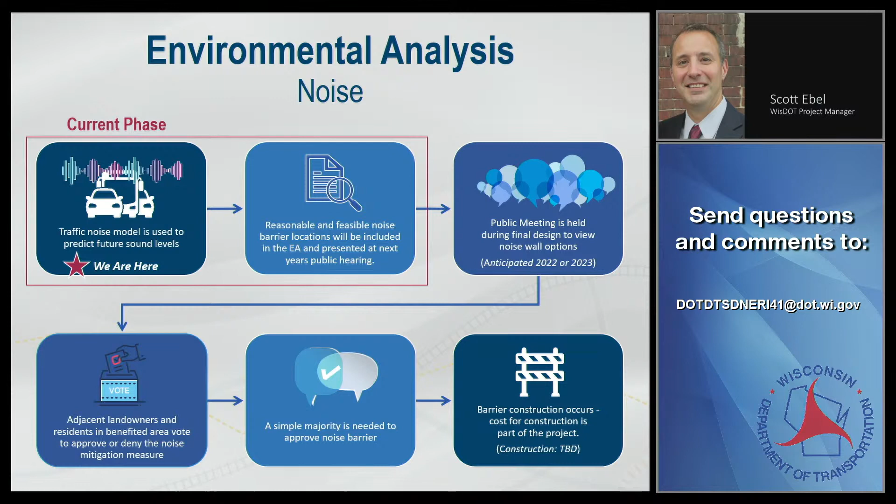We have a number of alternatives that we'll be looking at to treat the area in between closely spaced service interchanges, and between service interchanges and system interchanges. So I want to identify those right now.

One of those alternatives is an auxiliary lane alternative. An example of this would be the condition between Ballard Road and 441 as it is today, where we have an additional lane that parallels the through lanes of mainline traffic to facilitate weaving of vehicles.

There's a second alternative between interchange ramps called a collector distributor roadway, where traffic entering or exiting the ramps is routed onto a parallel roadway to the mainline roadway, so that weaving movements between vehicles destined for different locations occur off the main line of traffic, typically resulting in better operation and safety for the main flow of traffic.

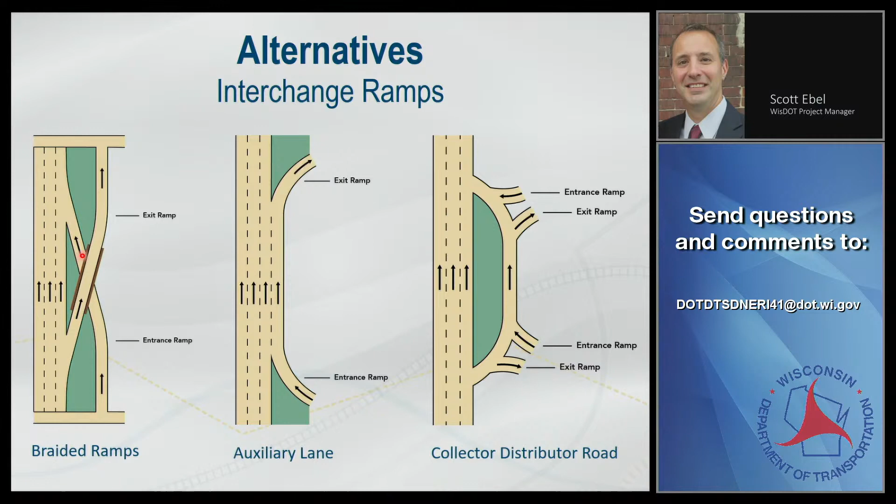There is a third alternative that we're looking at in a couple locations called a braided ramp, where instead of allowing the weaving to occur, we instead use a structure to have one direction of traffic move over the top or underneath the other direction of traffic between the exit and entrance ramps, so that weaving does not occur and we don't have any operational or safety issues related to that weaving.

Alternatives for our main line of the roadway include a 6-lane alternative, with 3 lanes of traffic in each direction and the potential for an additional auxiliary lane between some of the closely spaced interchanges. Along with this, we are also looking at a 4-lane typical section alternative, which would essentially reconstruct the facility similar to what's out there today, again using auxiliary lanes or some other treatment between closely spaced interchanges.

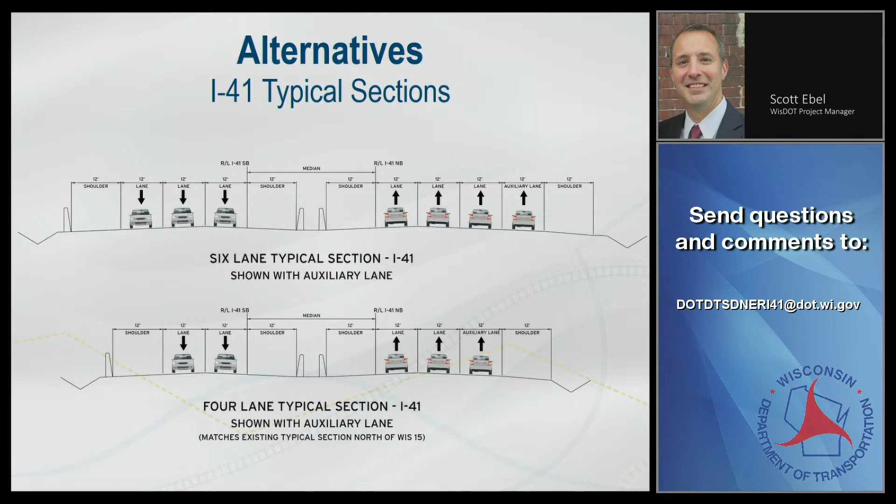We also have typical sections to show other treatments between interchanges. At the top is our 6-lane alternative with a collector distributor road. Here we have our main flow of traffic, and then a parallel roadway to handle ramp exit and entrance traffic off of the main flow. This treatment between interchanges can also be applied on the 4-lane mainline alternative.

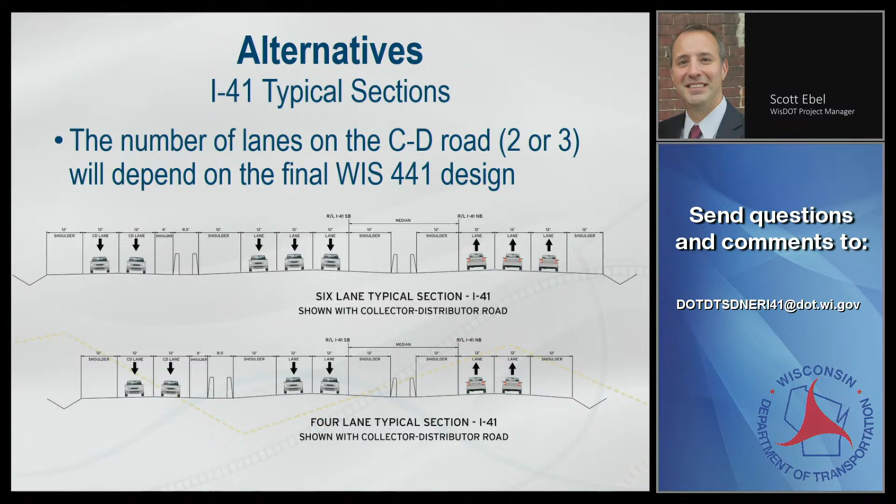At this point, I'm going to start going through specific interchange alternatives, for the most part heading from the south side of the corridor to the north side. We'll start at Highway 15 and County OO interchange with I-41, with 2 different diamond interchange alternatives. One of those would be a traditional signalized interchange, and the other one, instead of being signalized, would include roundabouts for the ramp terminals.

The costs here are very equivalent. The difference in impact is primarily real estate with the roundabout alternative. We also have a diverging diamond interchange alternative for this interchange. Again, costs are very comparable, and there would be some minor real estate impacts in line with the signal alternative, but less than the roundabout alternative.

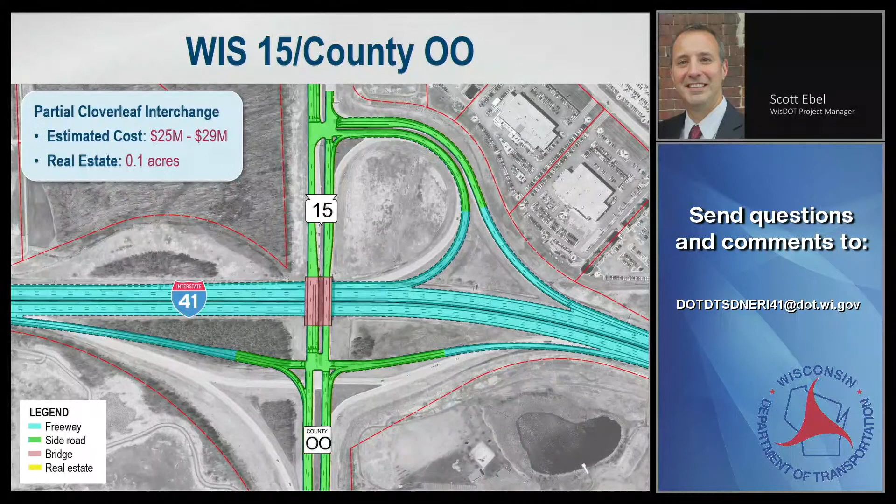We also have a partial cloverleaf interchange alternative for this interchange. This configuration is very similar to what's out there today, involving the loop ramp configuration on the west side of the mainline highway. On the east side of the highway, we would be going to a more traditional intersection format for both movements, essentially replacing the free flow condition that's out there today for traffic headed east, so that we don't have that weaving condition between the interchange and Blue Mountain Drive.

Along with that, in that similar configuration, instead of the partial cloverleaf with signals, we would also have as an alternative using roundabouts for those intersections.

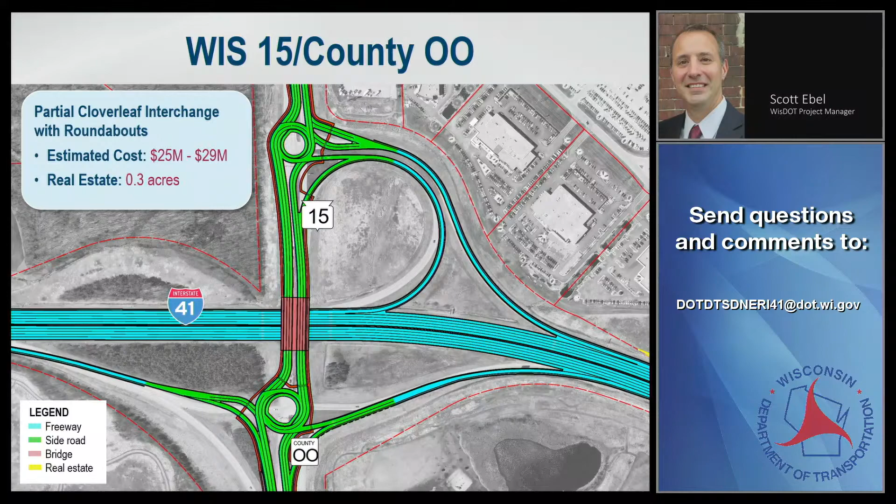I also want to point out that with a number of these alternatives, we are looking at the potential to eliminate access from Association Lane onto Highway 47. It's currently a right-in, right-out access, so we're looking at the potential, if there are safety or operational benefits to doing that.

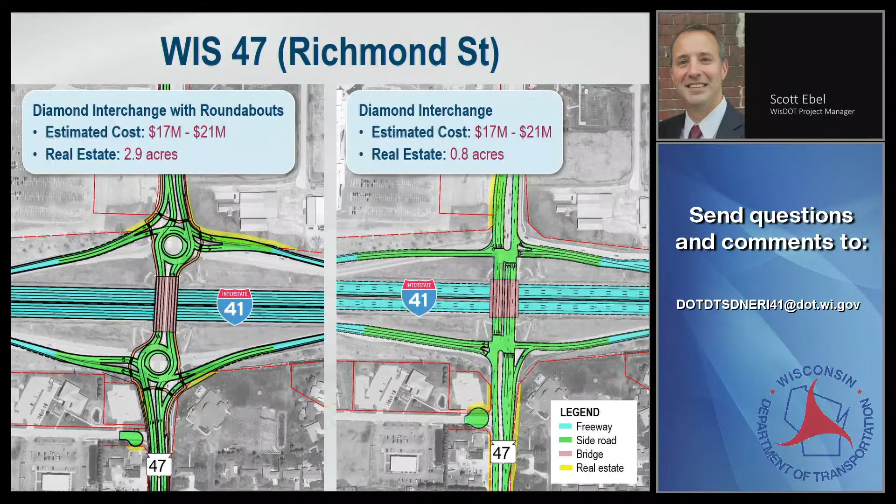We are also looking at the diverging diamond interchange as an alternative at Richmond Street. It has comparable costs to the other interchange alternatives and comparable real estate impacts, kind of between the signalized and the roundabout alternatives.

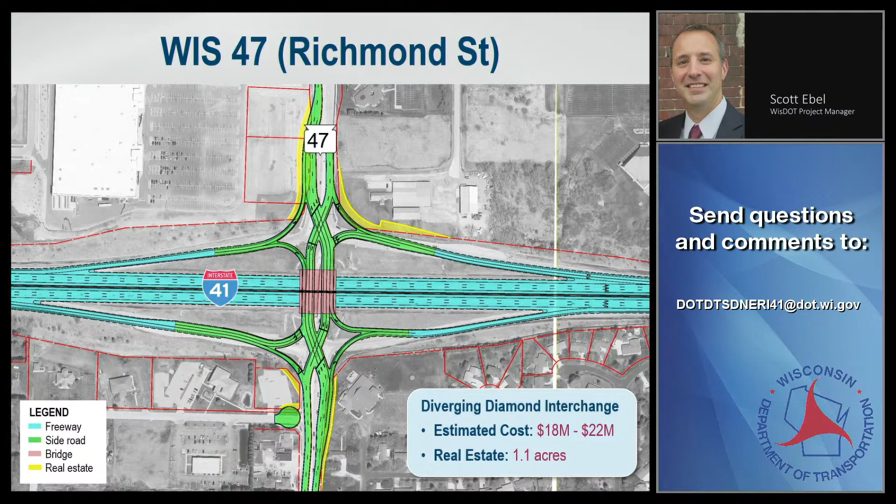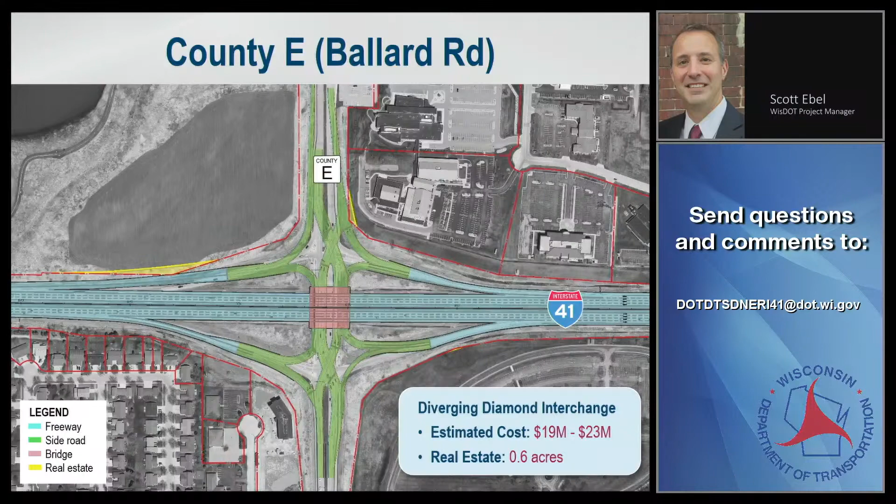Looking at alternatives for how we're treating traffic between the interchanges, I wanted to show a number of alternatives for how we do that. The first of these, and the one with the largest footprint impact, would be to use a braided ramp alternative. To explain a little bit how this works, on the left side of the screen would be the Ballard Road interchange.

On the right side of the screen would be the Highway 441 system interchange. If traffic coming from Ballard Road wants to get onto I-41 heading northbound, they would stay at the left-hand side of the split, then cross over traffic from 41 that's ultimately heading to 441 southbound, instead of having to weave with that traffic, and then would enter the traffic along with other I-41 traffic continuing northbound.

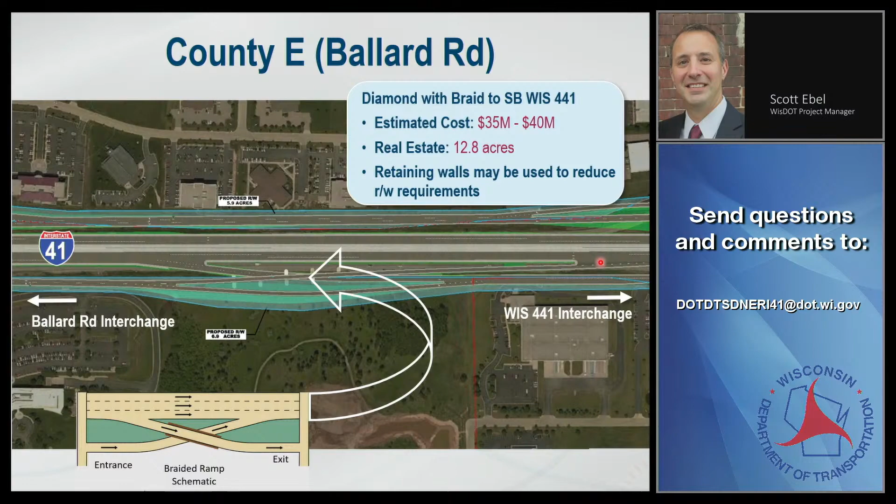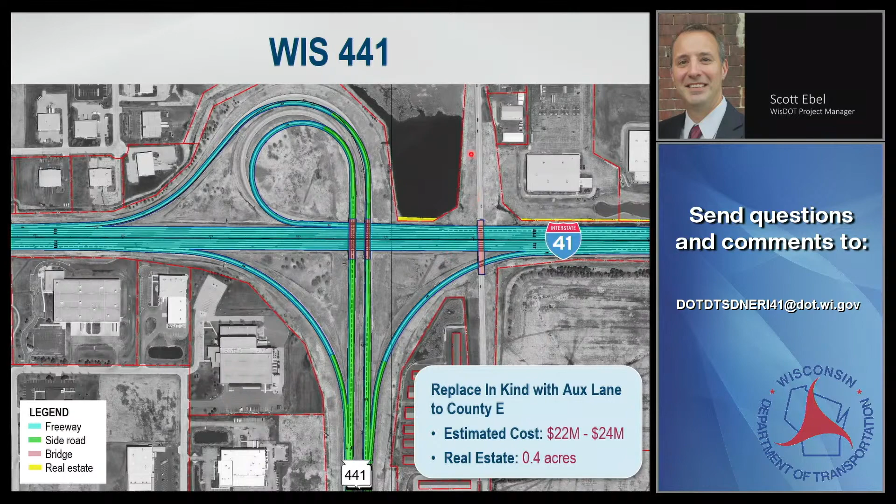We also have an alternative very similar to what is out there today, which would include an auxiliary lane between the Ballard Road interchange and the 441 interchange, with the two ramps in a similar location and configuration. With all of these alternatives for the 441 system interchange, we are proposing to replace the French Road bridge over I-41 and maintain that connection between Evergreen to the north and County Highway OO to the south.

Shown on this display is a 60 mile an hour flyover alternative. The higher speed ramps in this alternative do have some additional real estate impacts. I do want to point out that where we've identified real estate impacts, there could still be opportunities to further refine the design or use mitigation such as retaining walls in order to decrease the amount of real estate required.

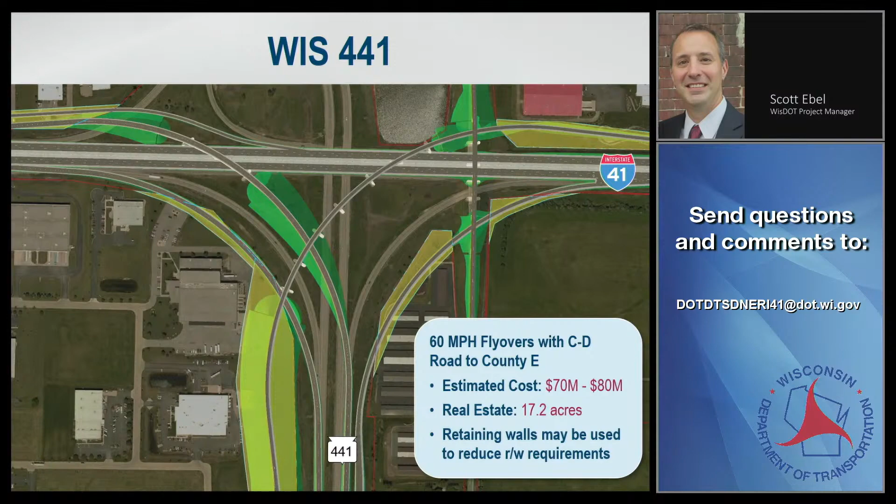Shown here again is that 60 mile an hour flyover alternative from an isometric point of view.

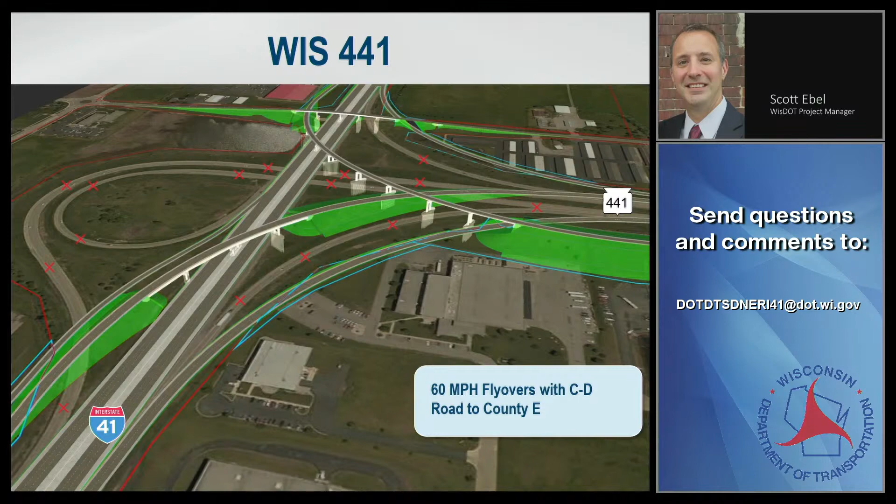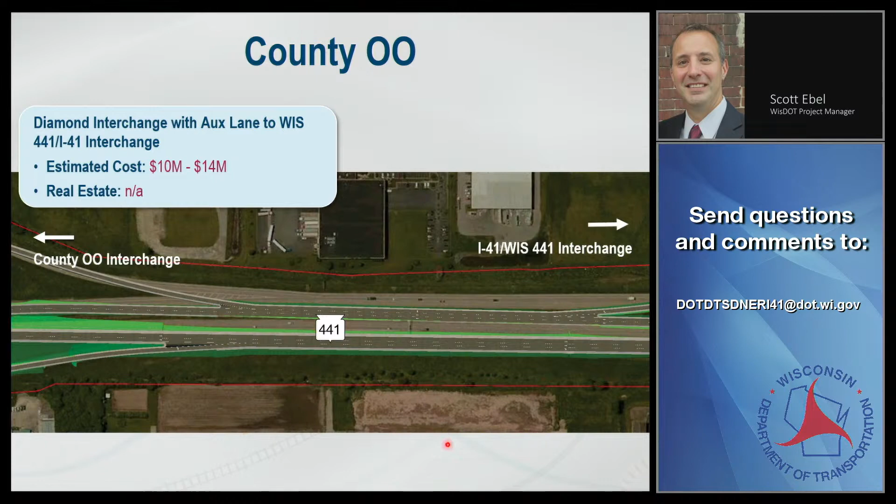One of those alternatives would be a partial cloverleaf, as Par-Clo refers to it on the slide. This would move the exit to Highway OO for 441 southbound south of the interchange instead of being on the north side. By moving it further south and using a loop ramp configuration, we are able to increase the weave distance available for vehicles headed south. This does have some real estate impacts and additional cost.

Under this consideration, we likely would not do anything with the northbound direction, since that reduction in weave distance is not as significant as on the southbound direction with most of the alternatives.

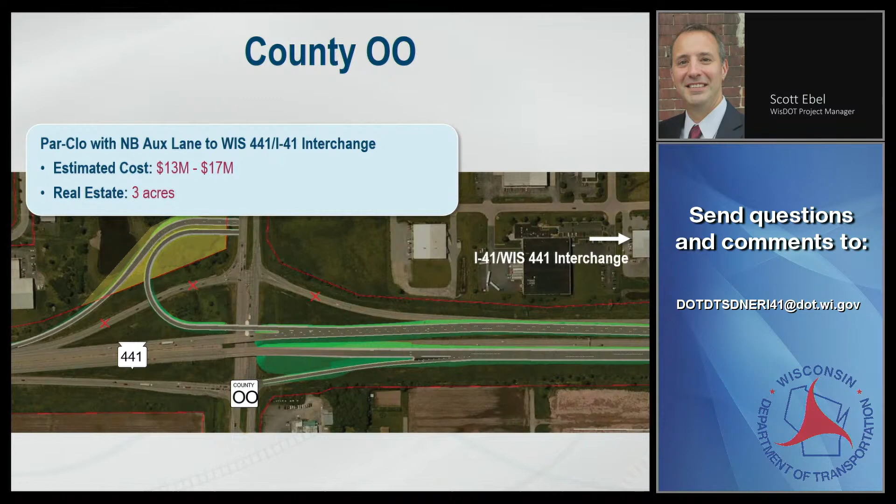This is that partial cloverleaf alternative for OO laid out in an isometric view. This is a third alternative to handle traffic between OO and I-41 along 441. We would also be looking at a braided ramp alternative here.

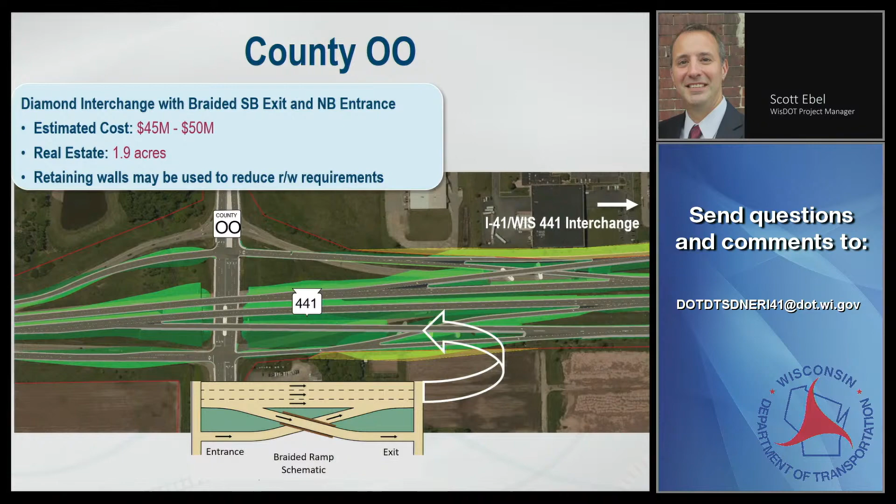This alternative does have a significantly higher footprint, but it does also have significant potential safety and operational benefits. I will switch to an isometric point of view to help describe how this would operate.

As a for instance, if traffic that was at OO and wanted to get onto 441 to ultimately get onto 41 northbound, would take the ramp or get on the ramp, would stay on the right hand side of the road and would continue and merge with 441 traffic that is already only destined for 41 northbound. So they do not have to weave with traffic that is trying to get to I-41 southbound as vehicles do today.

Similarly, traffic on OO that wants to ultimately get to 41 southbound would stay to the left at that first split, would then merge with 441 traffic that itself has already split into and includes only 441 traffic destined for 41 southbound. So that weaving that occurs today does not occur, which improves safety and operations.

I do also want to point out with this alternative that it could be applied not necessarily to both directions of traffic. It could be applied or selected as an alternative for just one direction of traffic. So for instance, if the southbound weave condition is worse operationally or safety-wise than the northbound condition, it could be applied in only the southbound direction and not necessarily be required to also be applied to the northbound direction.

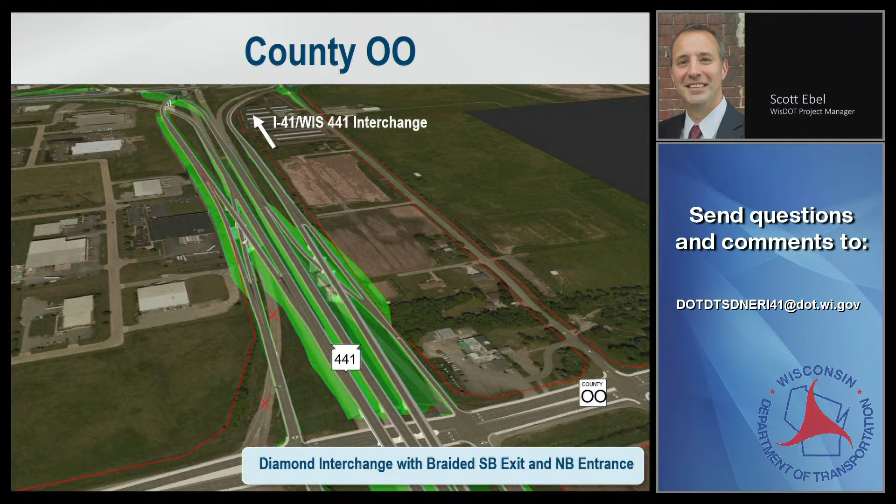Continuing to move north at the County Highway N interchange, at this location, we are primarily looking to keep a configuration similar to what's out there today. We are proposing to maintain signalized intersections at this location. We would be replacing the pavement and the ramps, and we would be replacing portions of County Highway N.

To the north and south of the interchange as would be needed, both to replace any older pavement up to the adjacent intersections, and also would be coordinating with the local community on any additional capacity that would be expected here. For the most part, we're trying to minimize any real estate impacts, especially to the south. This is a very built-up area.

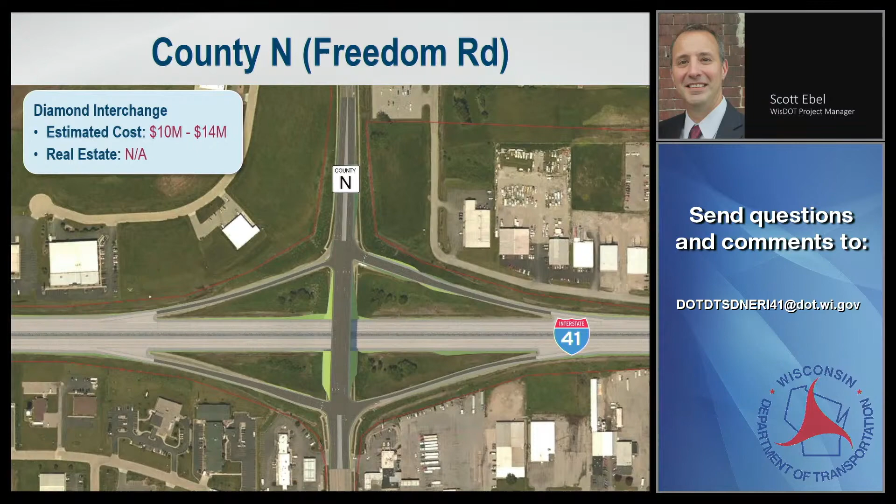At the Wisconsin Highway 55 interchange, again, we would not be looking to make any significant changes at this interchange. This interchange was recently reconstructed to include roundabouts. So we would basically be reconstructing the ramps to the limits of the previous project.

We would also be looking at the potential to increase the number of lanes between the roundabouts underneath the interchange in order to make sure that Highway 55 is handling the traffic it would expect to get. As part of this, also want to point out here that the bridges for I-41 over Highway 55 and also over Maloney Road would also be reconstructed as part of a mainline reconstruction alternative.

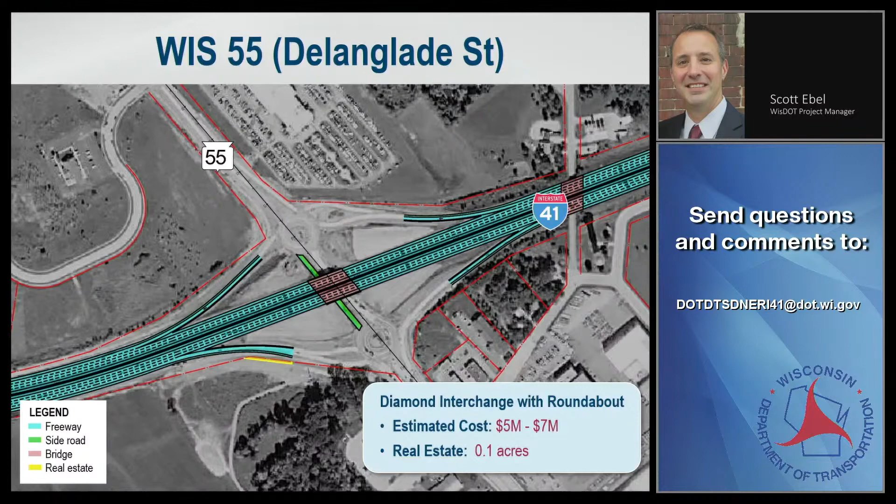At County Highway J, we would again be proposing as an alternative a fairly minimal change from the existing condition. This interchange was reconstructed, I believe, in 2010 with roundabouts. We would again be looking to reconstruct the ramps up to the limits of the previous project so that the ramps would be all new pavement.

We would also be looking to replace the County Highway J structure over I-41 and would be working with the local communities in terms of potential needs there for future bike pedestrian access, that sort of thing.

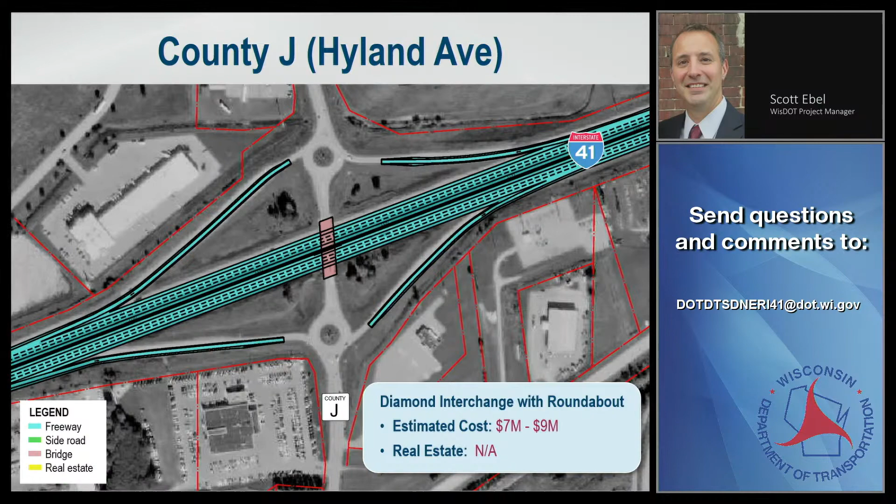At the County Highway U interchange, we have a number of alternatives as well. County Highway U, the first alternative I'm showing here is a diamond interchange alternative. This is very similar to the condition that's out there today. We would just basically be replacing and realigning a segment of County Highway U to make sure that it can handle anticipated traffic growth in the area.

We would be under this not anticipating too much for additional real estate impacts.

We also have another alternative for County Highway U that we're calling a reversed diamond interchange, where we would essentially change which road is the overpass road here. Currently, I-41 goes over County Highway U. Under this alternative, County Highway U would go over I-41.

This has some potential safety and maintenance benefits. It would be potentially easier to keep ice off of I-41 without having that structure go over the top of County Highway U, and it would also improve the geometrics of the southbound entrance ramp from U to I-41, in that you wouldn't be going up as steep of a hill when you're trying to make that merge onto I-41.

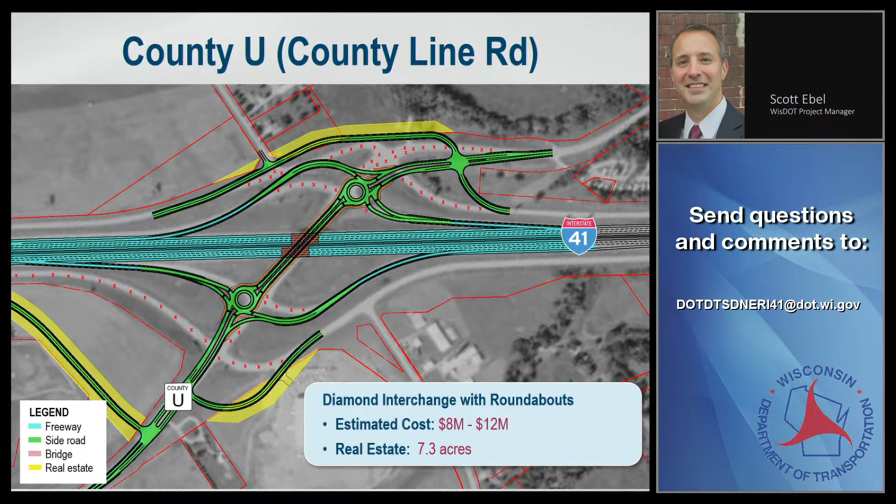As another alternative for the interchange at U, which is a modification of the first interchange alternative shown, the interchange itself would remain very similar to the condition it is today, but we would relocate the frontage road on the west side of the highway so that it was offset from the opposing frontage road, allowing for better vision of other vehicles traveling south on County Highway U.

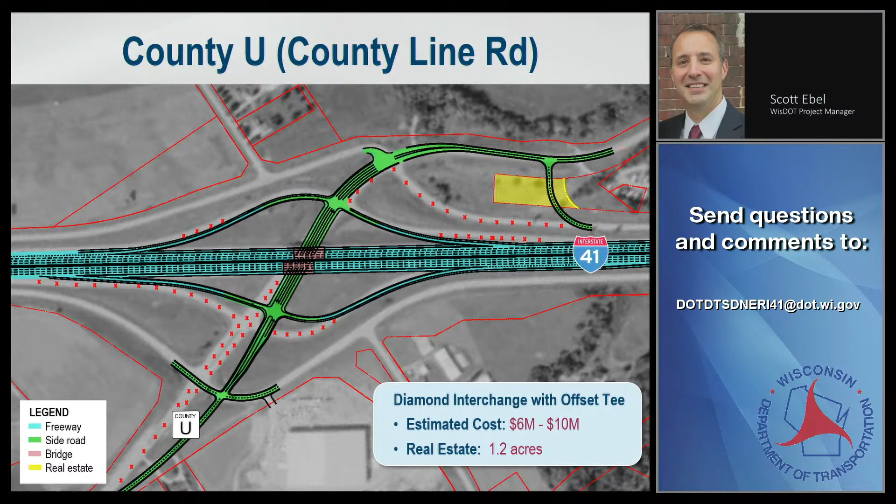Moving north to County Highway S, or Freedom Road, shown here are two different diamond interchange alternatives. One of those would be very similar to the condition that's out there today. We'd be moving the ramp terminals a little bit further away from the frontage roads in order to increase that spacing a little bit, but otherwise we wouldn't be anticipating any significant impacts with this alternative.

There is an additional diamond interchange alternative where we would replace the ramp terminals as well as the frontage road intersections with roundabouts. This would be very similar in concept to, say, Lineville Road just north of Green Bay off of 41. This alternative would have some additional real estate impacts associated with it.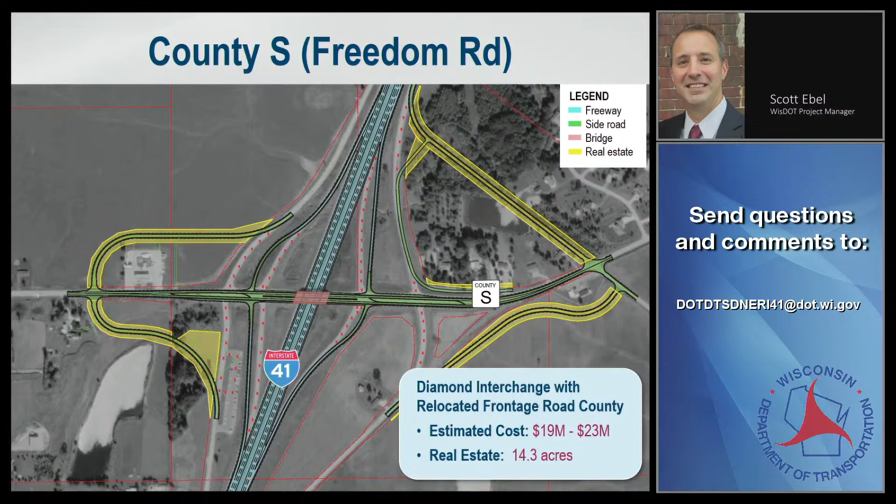There is also an additional alternative that, identical on the west side, would change a little bit the configuration of the interchange or frontage roads on the east side, by having the frontage road tie into, I believe this is Hickory Road, and then by realigning the frontage road on the north side of the interchange to tie directly into that. There would be additional real estate impacts associated with this, but we wanted to explore this alternative through this process because of the potential long-term benefits to safety and operation at the interchange.

That addresses the interchanges already out there. But we do have a potential new interchange along the corridor associated with Brown County's Southern Arterial South Bridge Connector study. Their Tier 1 final EIS record of decision for their study is anticipated in October of 2020. They've identified their Alternative 2, the Rockland Red Maple South Bridge Corridor, as their preferred alternative in their draft environmental impact statement. DOT has committed to building the new interchange at I-41 as part of the I-41 project if that is included in Brown County's record of decision.

Shown here is a layout that would include the new interchange for the Southern Arterial Corridor. Between Lawrence Drive on the east side and, I believe, County Highway EB on the west side, this is Segment 1 in Brown County's study. Under this project, we would be clearing the environmental impacts, what we'd call the Tier 2 environmental impacts, for this entire segment.

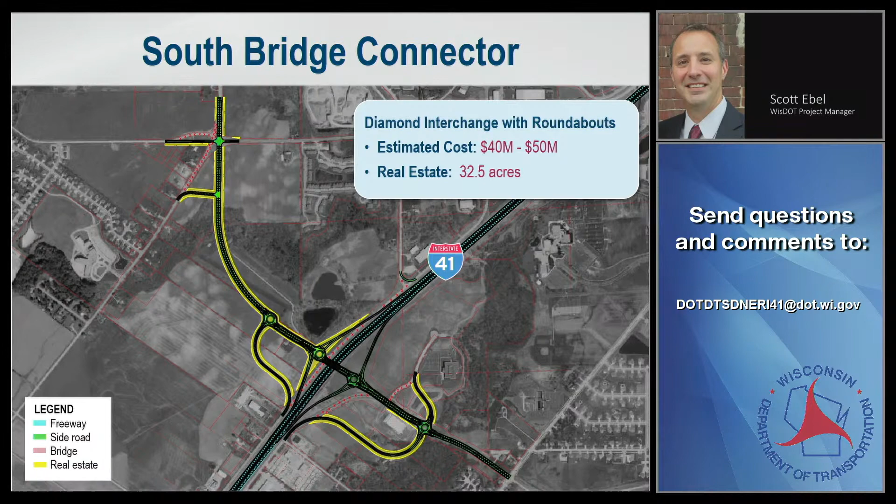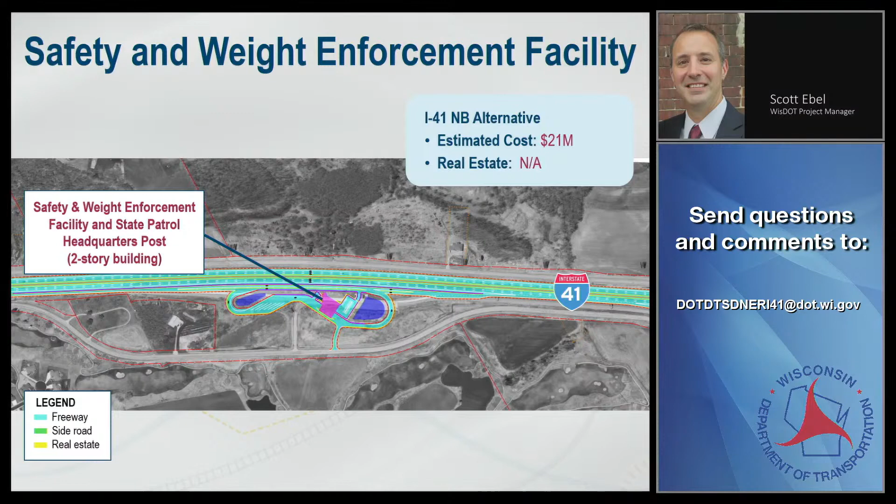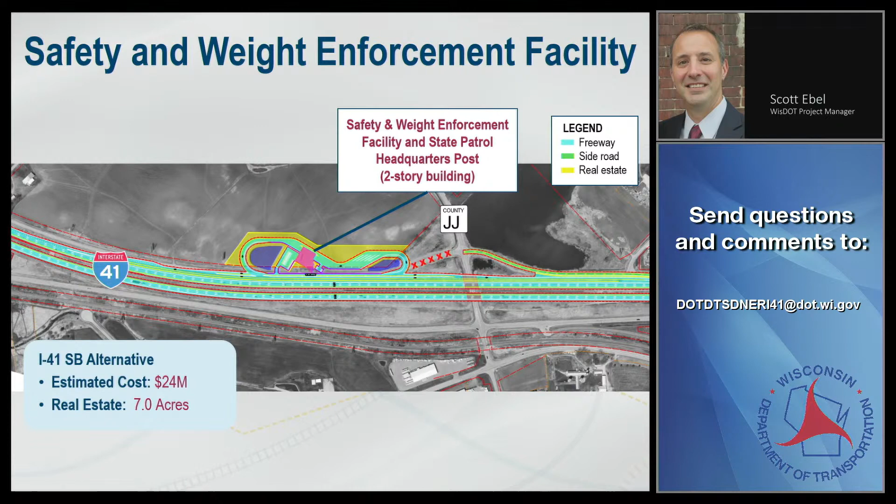All right. Talking a little bit about project schedule and key milestones for the project. This meeting is part of our public involvement meeting process. We had our first round of meetings, both local officials and public informational meetings, back in the spring. This is that second round.

Following this, we will be looking to complete our environmental assessment by June of 2021. From there, we would be looking to hold a public hearing in July of 2021, getting final environmental approval by November of 2021. Looking further out, we would be looking to perform our final engineering 2022 through 2024 and potentially beyond.

Additionally, we would then be looking to do our right-of-way acquisition, utilities, things like that from 2023 and beyond, with construction ultimately to be determined.

As far as next steps, we want to try to establish trust and credibility within the community. That's the purpose of these meetings today. We want to be as transparent as we can in this process, and we want to seek public input at our project milestones and in between project milestones as well.

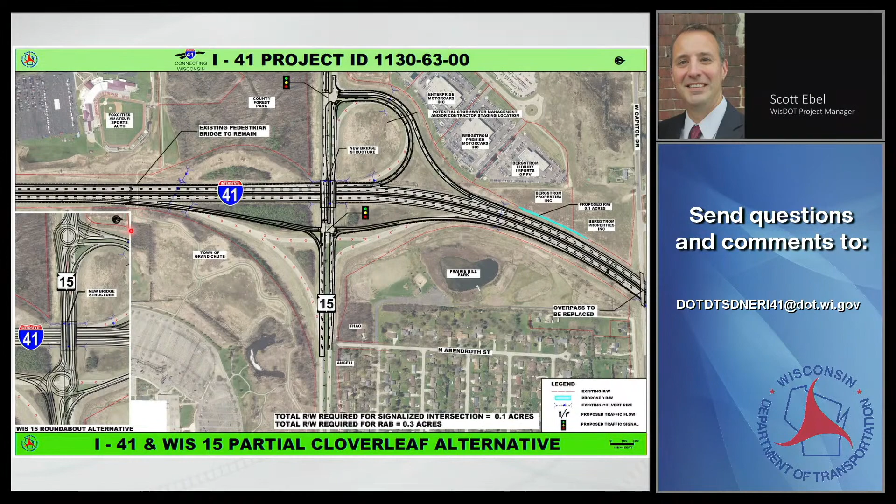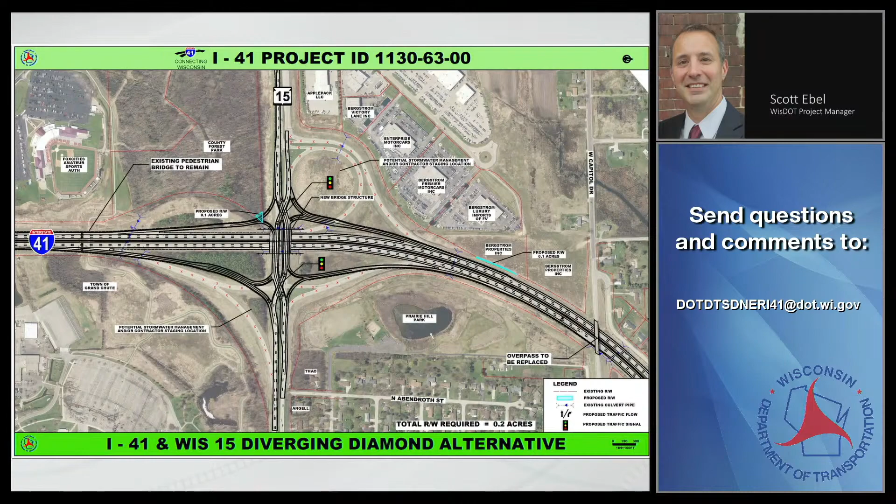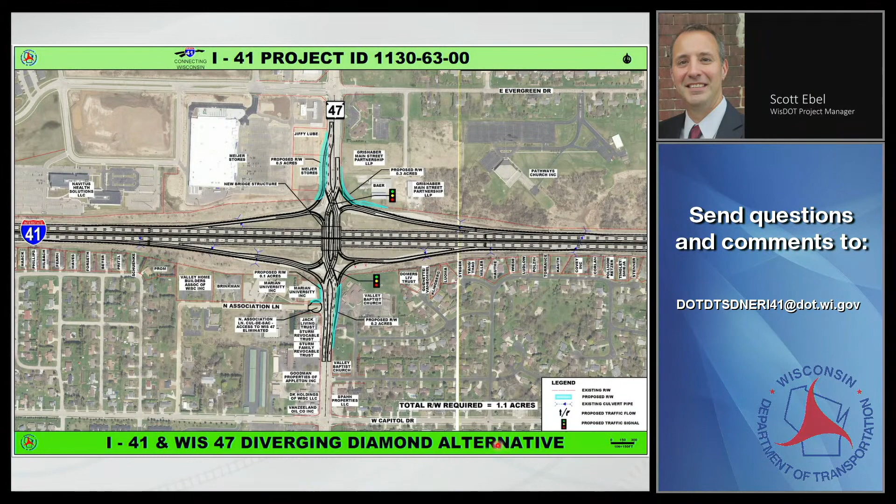This display shows the diverging diamond alternative for Highway 47. Again, those real estate impacts are just a little bit more than the signalized alternative on the previous display, significantly less than the roundabout alternatives. But the locations are a little different between those different alternatives.

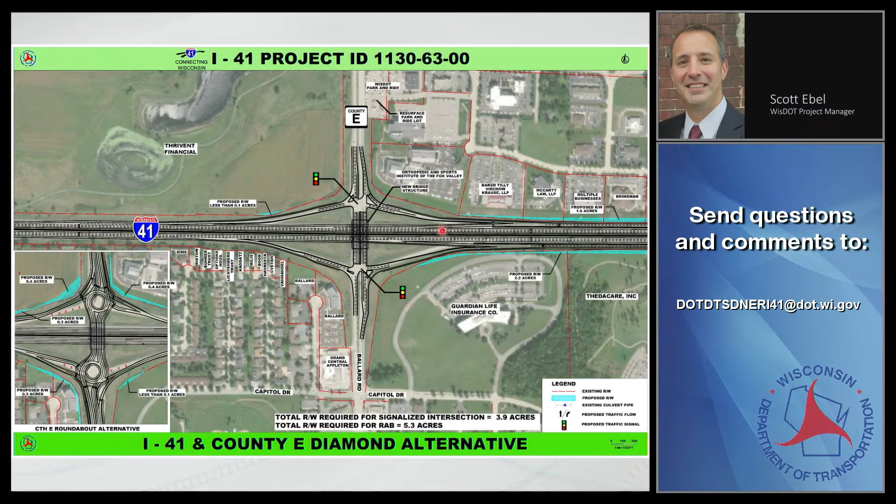The County Highway E or Ballard Road interchange alternatives are shown on this display. This one shows the signalized diamond alternative and the roundabout diamond alternative. I will point out on this display as well that it's showing a collector-distributor system further to the east. These are all compatible with auxiliary lane systems as well as the braided ramp alternative.

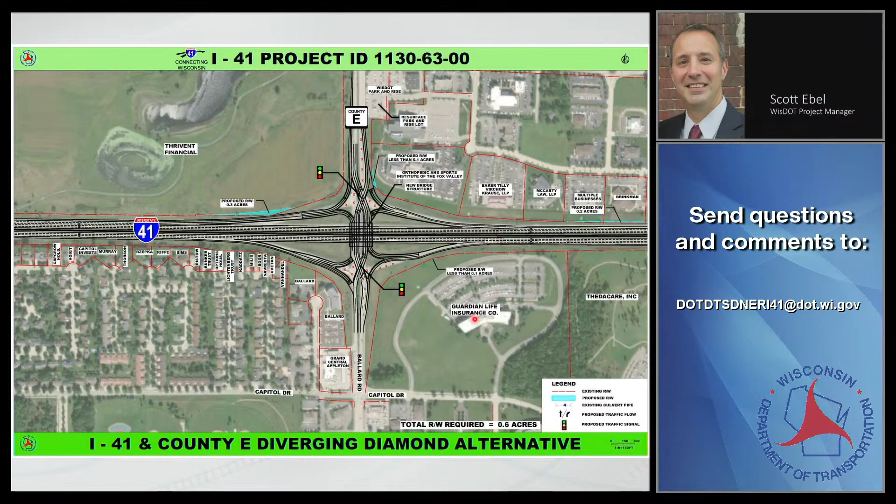This display shows the diverging diamond alternative for this interchange, which again has different real estate impacts than the other alternatives. Shown here is the auxiliary lane alternative for the area between Ballard Road and 441, which again is compatible with the other alternatives for mainline between the interchanges.

This display is trying to get at one of the different alternatives between the Ballard Road interchange and the 441 interchange. This one is showing the collector distributor alternative, and how there's a kind of a separate parallel roadway between the interchanges for ramp traffic to exit and enter onto that parallel roadway before combining back in with mainline. So that weaving action between the interchange ramps is occurring off of the main line, which helps improve the safety and operation of the mainline traffic.

This does have more of a real estate impact than the auxiliary lane alternative, but significantly less than the braided ramp alternative.

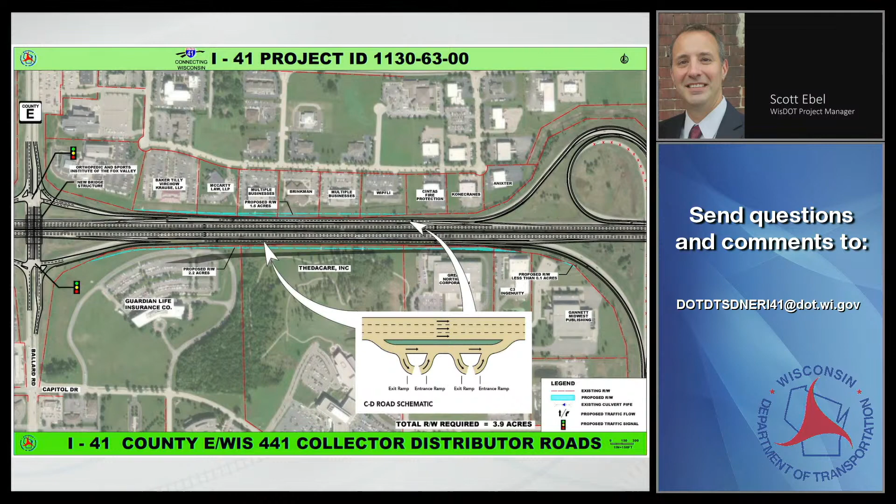This display is showing that auxiliary lane alternative between the interchanges. That is very similar to the condition that's out there today between these two interchanges, where today we have the 2 through lanes in each direction with the additional auxiliary lane, kind of that ramp-to-ramp lane. That ramp-to-ramp lane assists traffic in weaving to and from the main line without having to necessarily enter the main line. If you are just making that ramp to ramp move, you're not requiring that traffic to enter main line. So it does help with safety and operation over that condition.

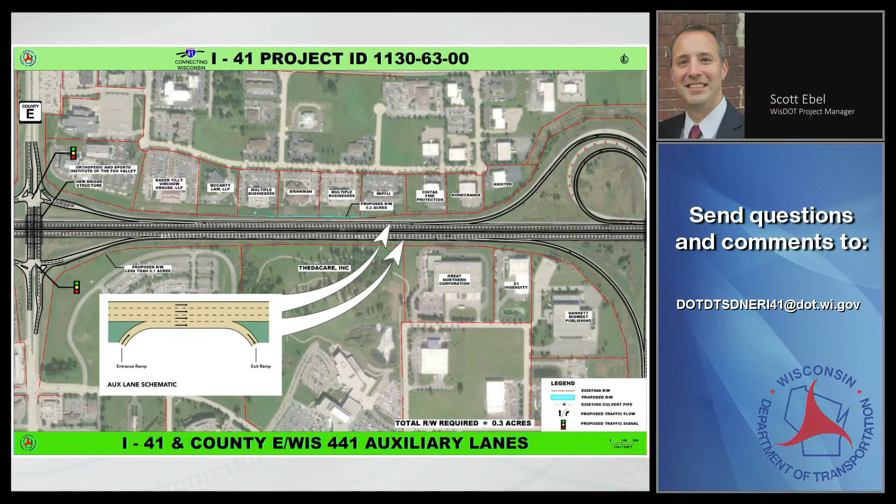And this alternative is showing for the northbound direction a braided ramp alternative, which is a way to handle traffic from the ramp by crossing over or under the other ramp traffic that it would otherwise be weaving against. So you don't have that weave condition that you would have today, or even under a collector distributor system. This is operationally a very sound alternative, but does have some additional real estate impacts associated with it.

On the southbound facility shown here is a collector distributor roadway system, but this display was laid out with the flyover alternatives at the system interchange in mind. So Ballard Road here has actually exited south of the system, or kind of in the middle of the system interchange on a separate ramp, and is already on the right-hand side of the roadway. It would not need to weave with traffic from 441 that's also trying to get to the ramp.

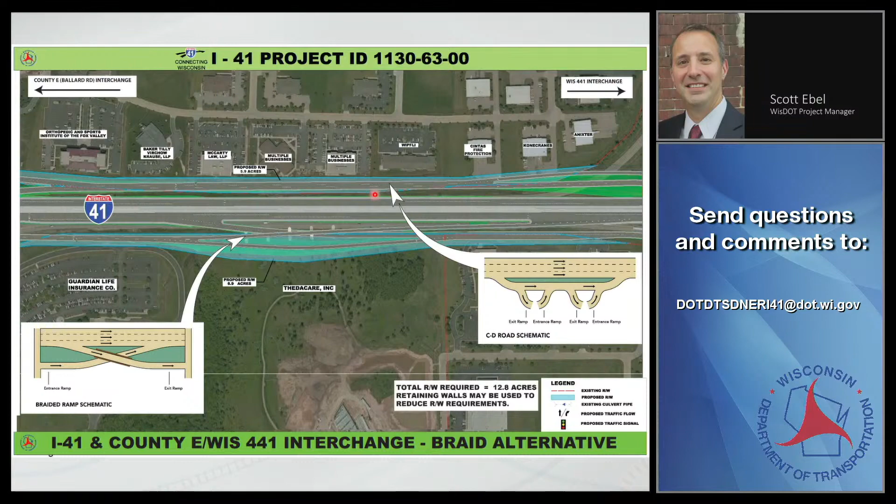And then for the southbound side, keeping that as a single lane until it meets with traffic that's coming from I-41, also destined for 41 southbound, instead of having the 2 lanes heading southbound that's there today.

This is another trumpet alternative that is very similar to the condition that's out there today, shown on this display. It has auxiliary lanes between the interchanges, loops that are very similar in location to what's out there today, with a similar bridge configuration. Again, pointing out that the overpass of French Road over I-41 would be reconstructed and maintained under all of these alternatives.

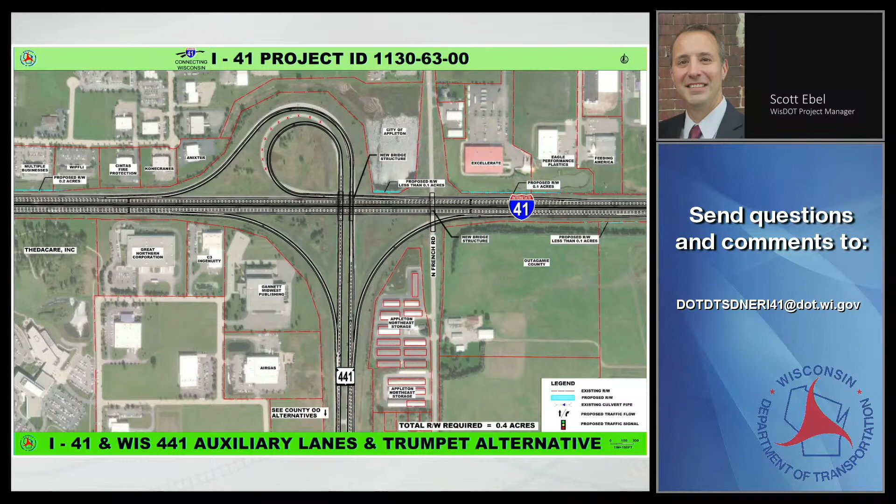It does have additional impacts associated with it in terms of the real estate that would be required, and certainly would have an additional cost.

And this display is showing the 60 mile an hour alternative for the ramps, which would again have higher real estate potential impacts than the 55 mile an hour ramp speed impacts would.

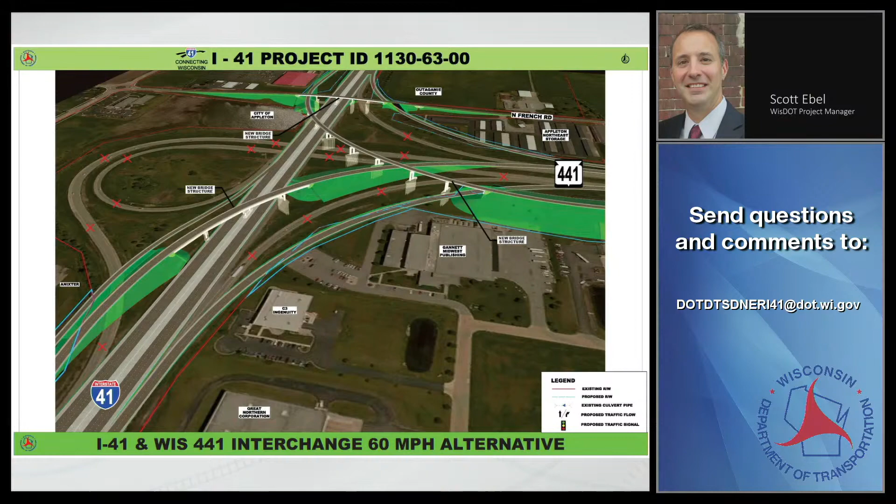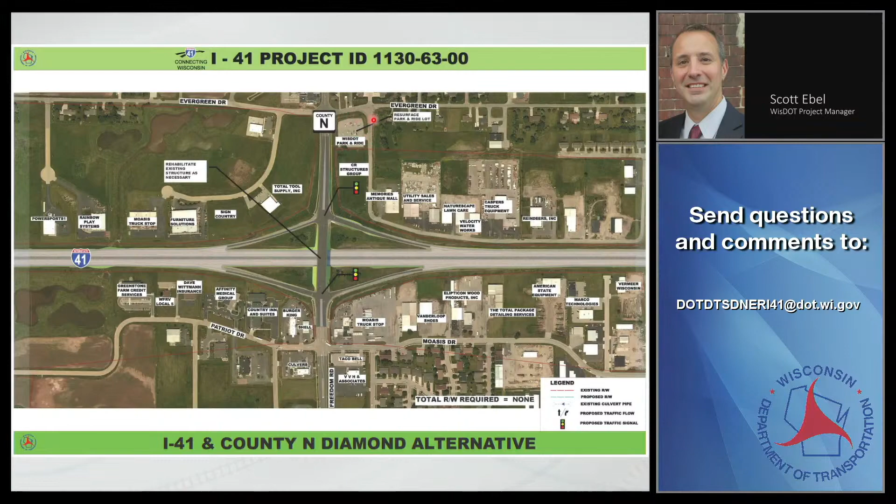Also to point out at this location, there is a park and ride off of County Highway N that we would be looking at whether or not we needed to resurface or replace the pavement on.

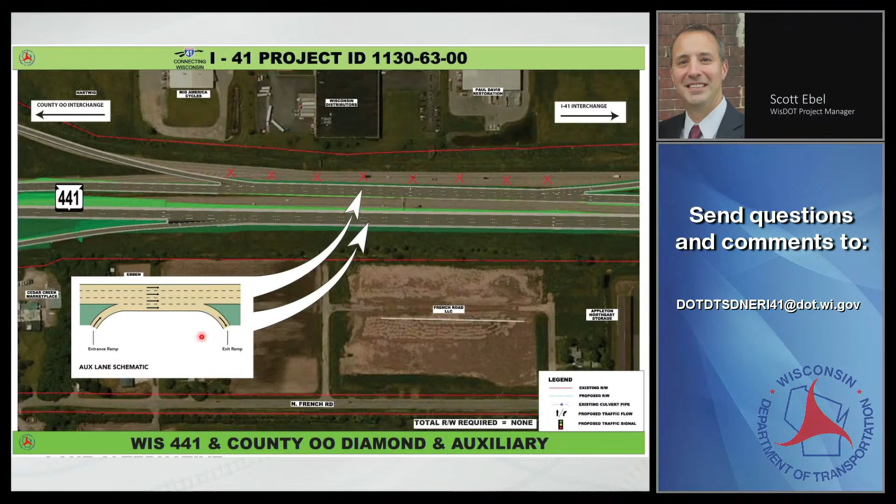Again, this is that partial cloverleaf alternative shown from an isometric point of view.

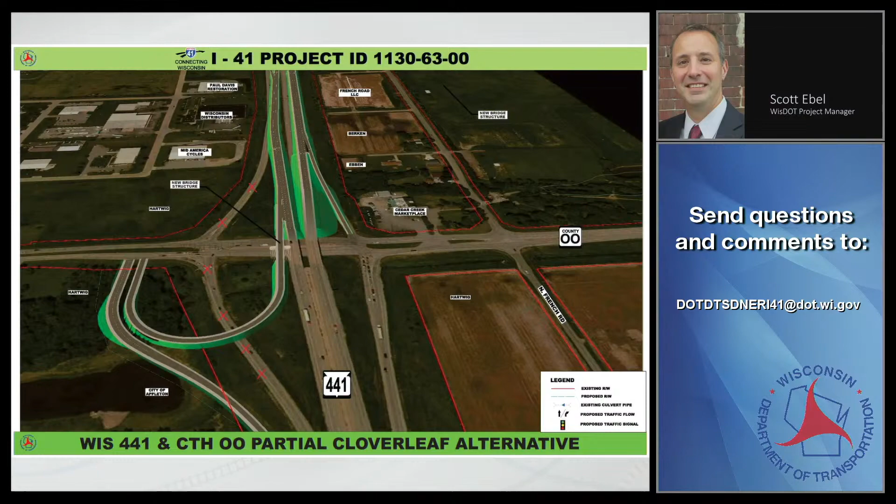To give a little more detail on the braided ramp alternative, this display shows it under an isometric point of view. I explained earlier the northbound direction from County OO. I'll try to explain it again using the southbound direction.

If traffic is coming from I-41 southbound and wants to get onto County Highway OO, they would take their ramp from I-41, take the flyover ramp, come around the curve, stay to the right-hand side at the split, and join with the ramp down to OO.

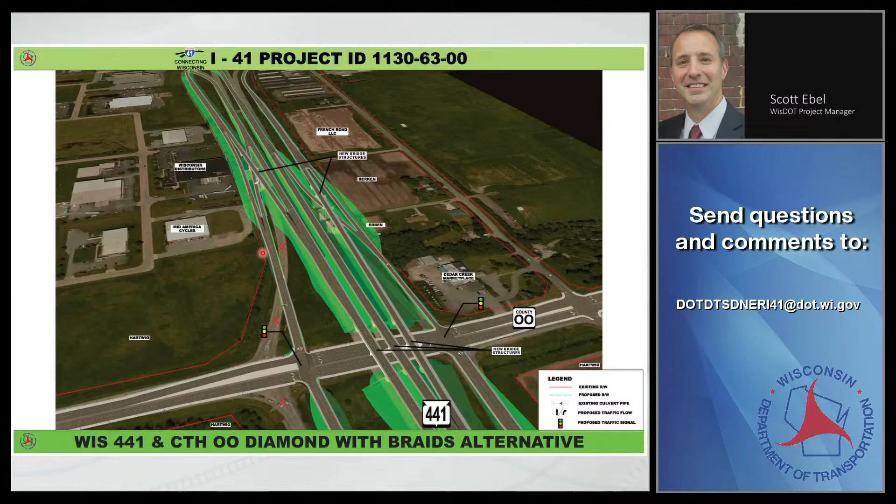This display is showing the diamond alternative for the County Highway U interchange. This would be a condition very similar to what's out there today, with some minor realignments of County Highway U, making sure that it, particularly between the interchange ramp terminals, can accommodate future traffic growth in the area.

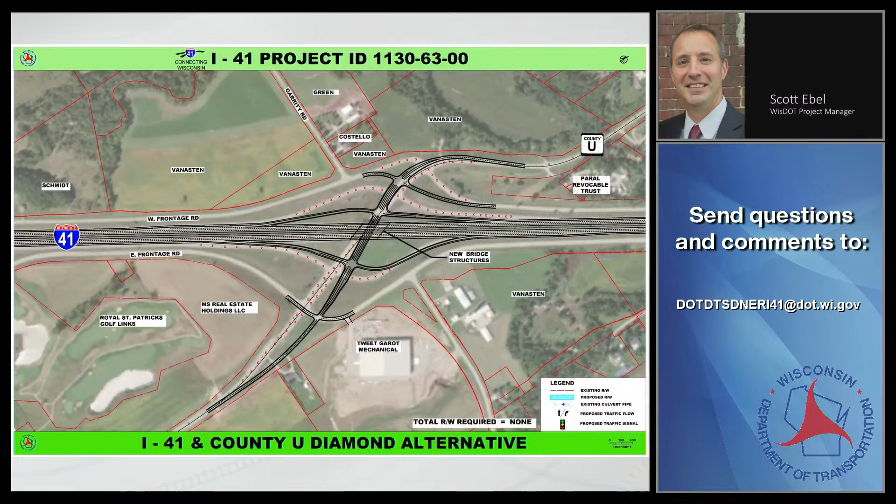This alternative shows the reverse diamond alternative, where we would switch the condition of the interchange from I-41 being over County Highway U to I-41 being underneath County Highway U. This would largely fit within the same footprint that's out there today, but has additional construction costs. There are also some maintenance and safety benefits associated with this.

Maintaining the structure of I-41 over County Highway U, those structures tend to ice up quite a bit. It's a county maintenance issue they need to address every winter. This condition would be easier for them to maintain. There are also safety benefits, particularly for the southbound entrance ramp to I-41, where they wouldn't have as steep a hill to climb. Vehicles, especially trucks, getting up to speed at this interchange can be an issue.

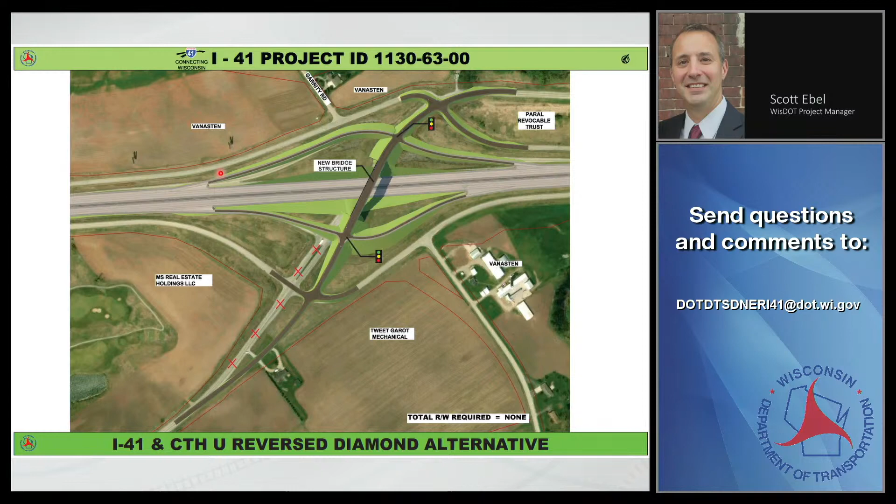This is showing that reverse diamond alternative from an isometric point of view.

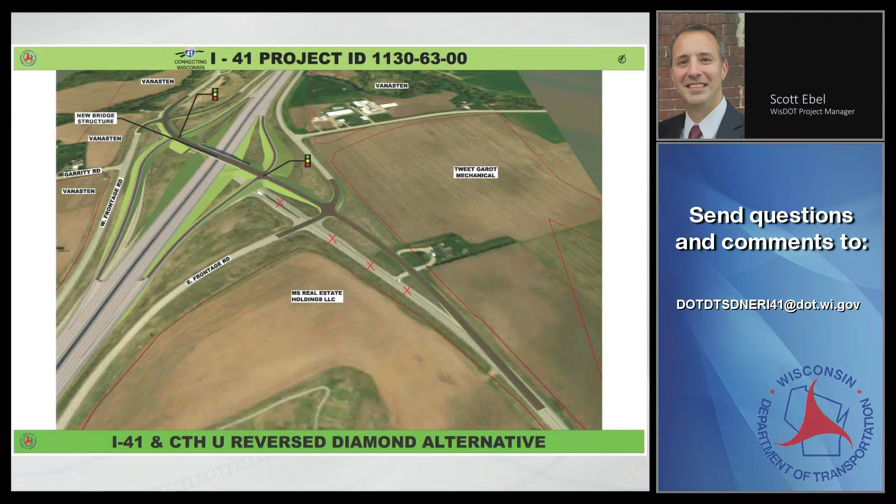It also makes it easier to see traffic coming from the north on County Highway U. You're not looking back over your shoulder for that traffic as much as you are in the condition today.

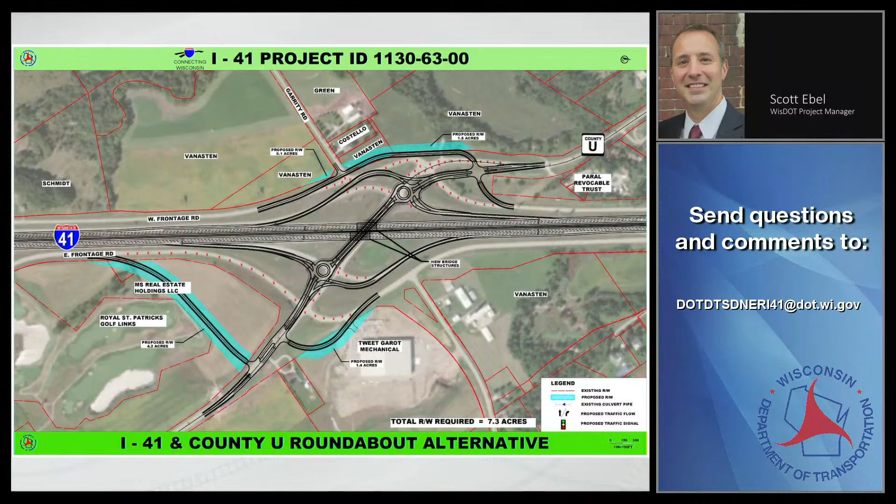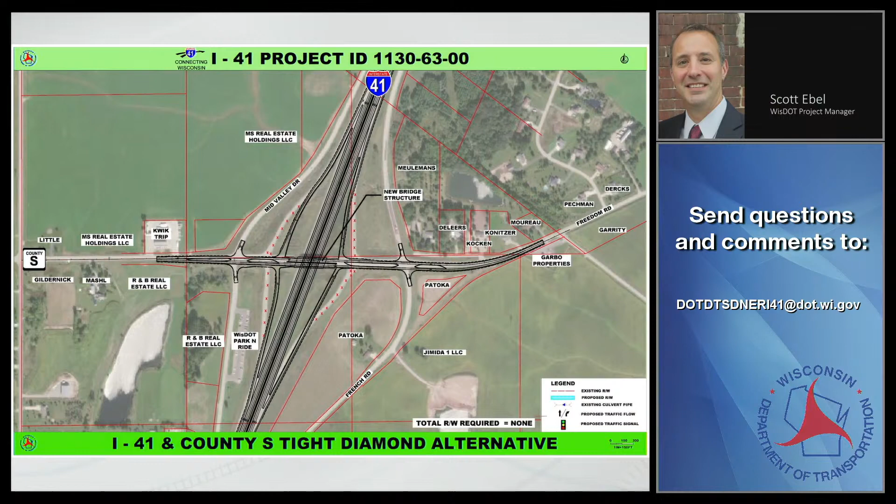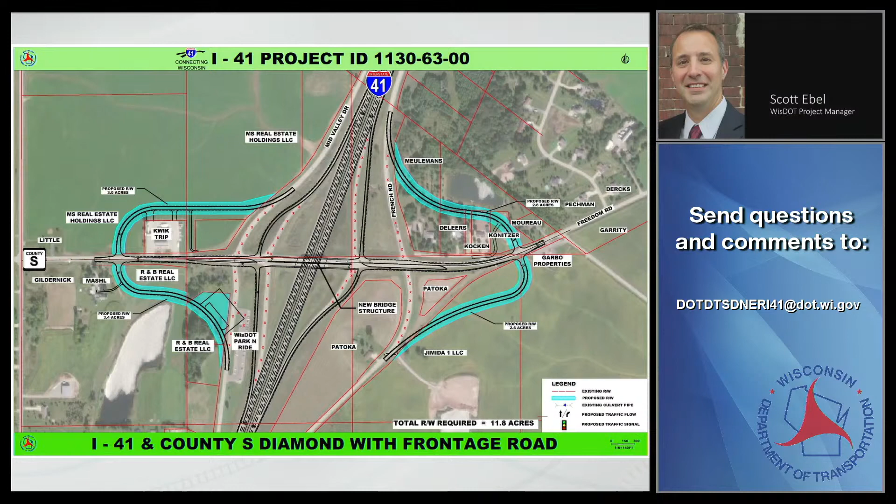This display shows a diamond alternative with relocating or moving out the frontage roads in order to increase the distance between the frontage roads and the interchange terminals, which we hope would address potential longer-term safety and operational issues from having the frontage road and the ramps so close to each other, but this does have some additional real estate impacts associated with it.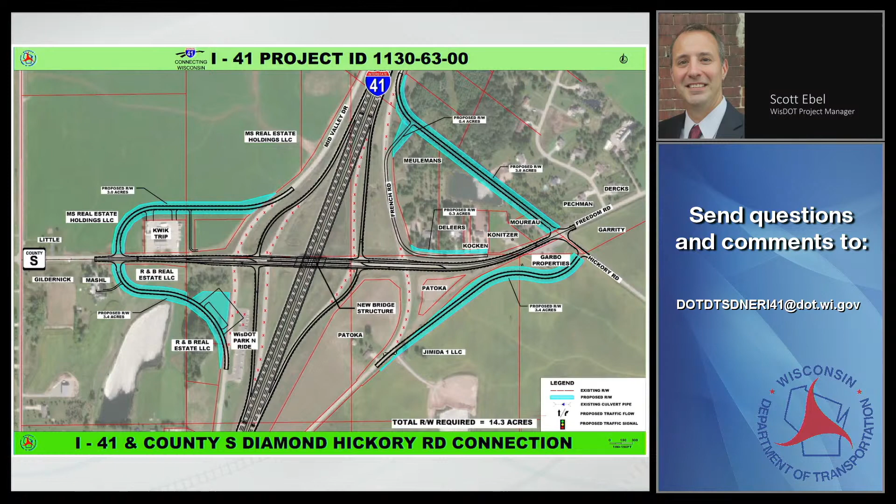Our final alternative for County Highway S would be a roundabout alternative for the interchange ramps and also the frontage roads themselves, which involves some realignment of the frontage roads and some real estate impacts, but less so than the other frontage road alternatives. That should be it for this.

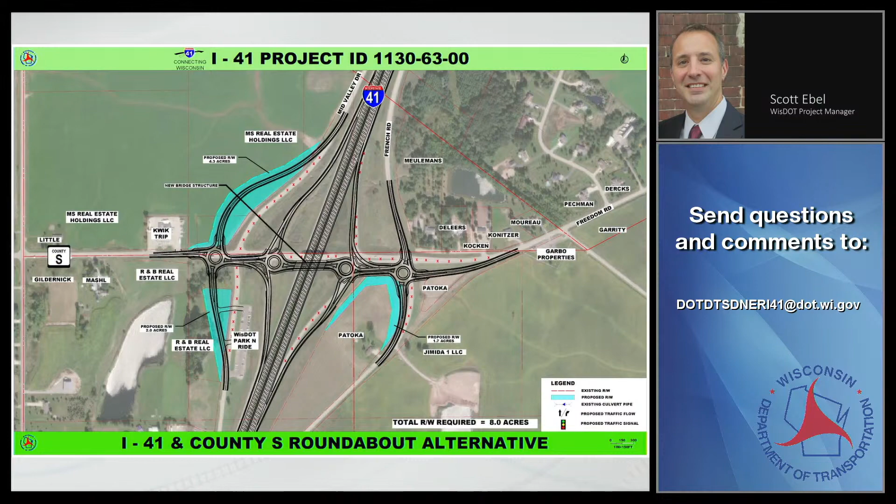I'm jumping ahead a couple displays, and I'll move back shortly here. So we would have either a traditional signalized alternative here or roundabouts. As mentioned before, this would involve relocating the frontage roads. Shown on this alternative is an option for relocating those frontage roads. With this display, we're not precluding alternatives that would maybe have less of an impact with the frontage road relocation.

Comments regarding the interchange and the layout of the interchange are certainly appreciated. I do want to point out that with this alternative, the frontage road in the northwest quadrant would get redirected back into Quarry Park Drive, under the new interchange here. There probably is not an option for maintaining that frontage road access to what would be the new roadway here.

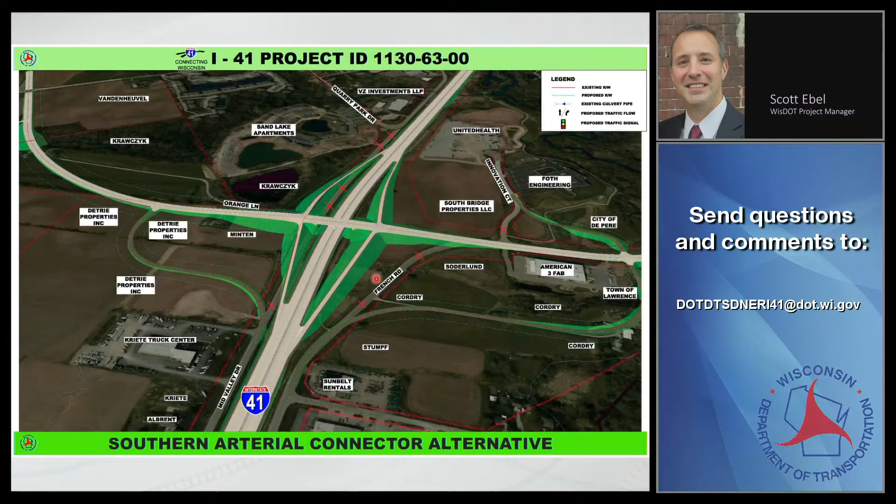This alternative lays out that entire segment, which would be segment 1 of the Brown County study's entire corridor. As mentioned before, this environmental process is covering the impacts of this segment of that corridor alone. Primarily, without the interchange here, or with the addition of the interchange here, there is a connectivity to the rest of the roadway system that would need to occur. So this project is looking at what would need to happen in order to maintain all of that connectivity.

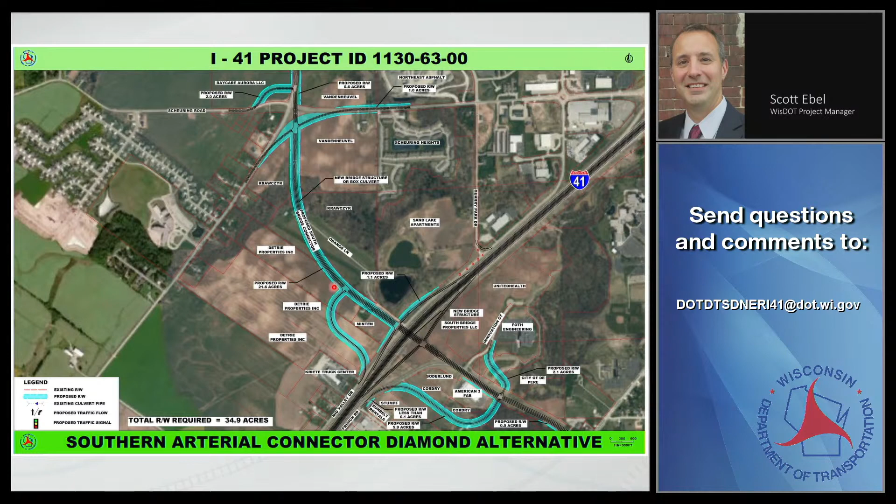Shown here are more traditional intersections, whether they're stop control or signalized, based on traffic warrants. This display is showing, again, that corridor with roundabouts for the frontage roads and for the ramp terminals.

Pointing out again, Hemlock Creek runs through this area, so we would need to construct a new bridge structure or box culvert over Hemlock Creek. There is also Ashwaubenon Creek in the south, in the southeast quadrant, which would need to be examined for potential impacts.

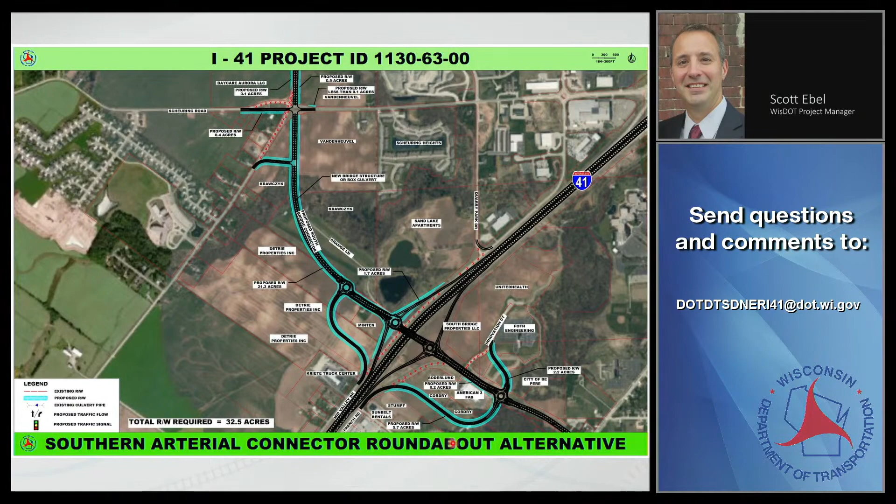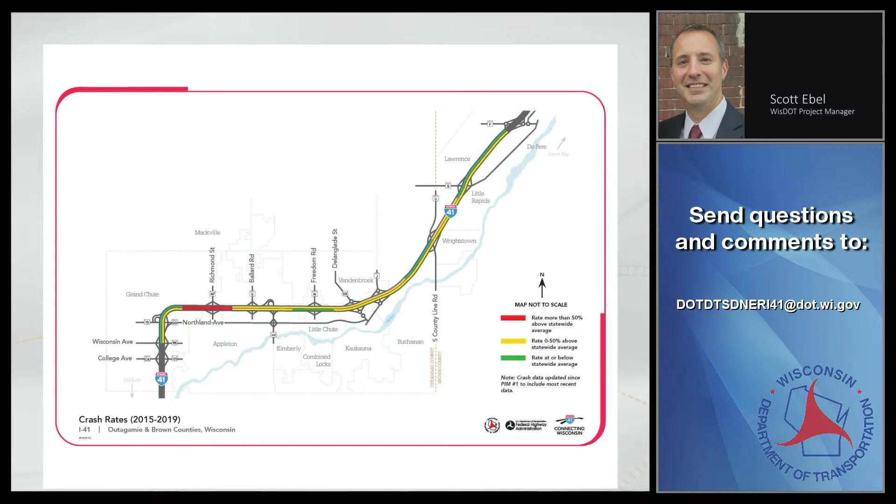Some additional displays, aside from just the interchange alternative displays we would have had at an in-person meeting, will be up on our website, including this display, which shows the crash rates from 2015 to 2019. This is an update of a display from our previous public information meeting. We've since had updates to our crash numbers through 2019, so we've updated that display to show where we have rates more than 50% above the statewide average, between 0 and 50% above, and at or below the statewide average.

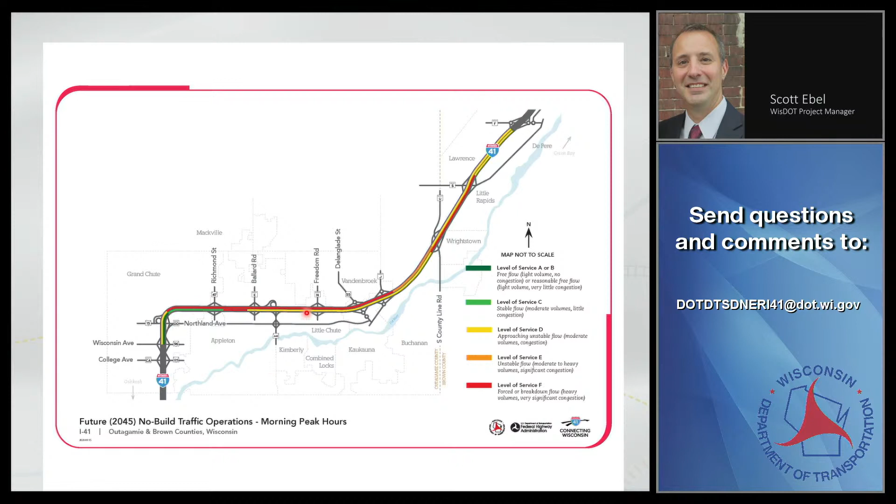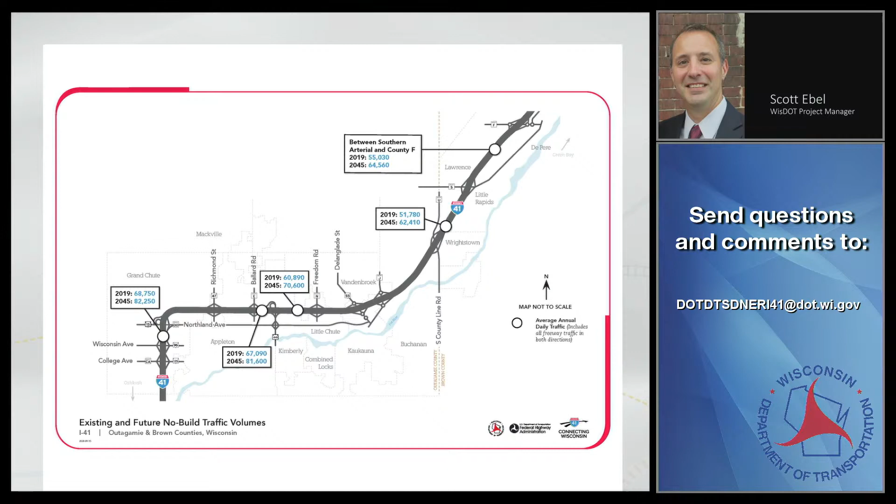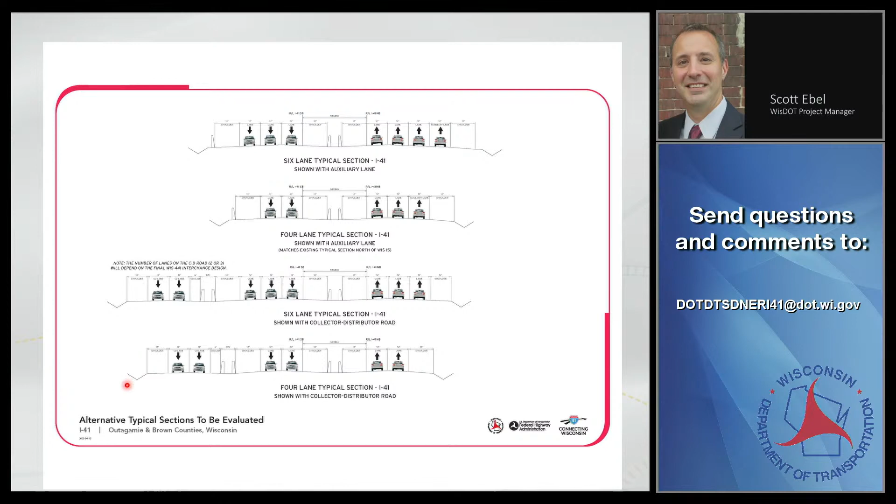This display shows the alternative typical sections being evaluated. One is the 6-lane or expansion typical section, shown here also with an auxiliary lane. Another is the 4-lane, or kind of a reconstruct similar to what's out there today, condition with an auxiliary lane potentially between interchange ramps. Also shown is the 6-lane alternative with a collector distributor road between some of the interchanges as needed, and the 4-lane typical section with the collector distributor between interchanges as needed.

This display is just explaining a partial cloverleaf diamond interchange. We had a number of displays like this at the previous meeting for roundabouts, signalized, and diverging diamonds. We wanted to add one for the partial cloverleaf alternative at the Highway 15 interchange, so that we explain that in more detail.

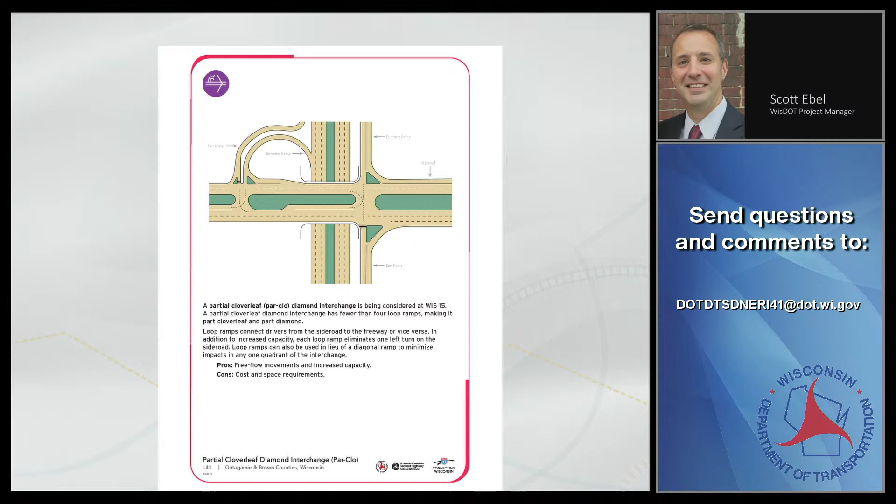This display describes braided ramps, which is a new alternative at this meeting that we've gone through. The intent of the braided ramp is to remove weaving conflicts by separating the merging traffic onto different ramps. So for instance, when an entrance ramp from one interchange is braided, or goes either up, over, or under an exit ramp for the next interchange, it eliminates the traffic weaving that would occur between those ramps.